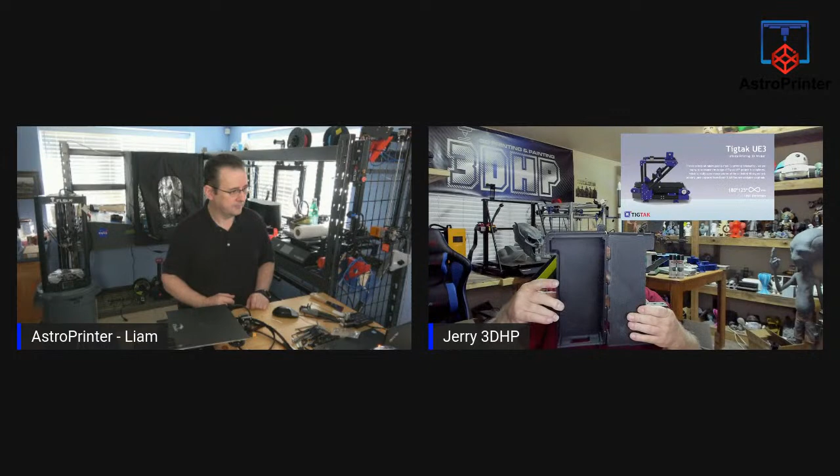What I'm partly thinking, and Jerry's even thinking the same thing, is making the two parts that are there and mounting them and gluing them together, making them permanently attached and leaving it at that. This is a side right here that's too narrow, and if I cut out most of this where it connects, it'll allow enough room that once they're glued together your power supply will fit in there. Yeah, we need an extra 10 millimeters wide on that. So I'm waiting to see if they can get it done to me in the next week or so. If they don't, then I may reach out to you, Ben, and work with you on getting it modified.

Hey Marlon, good morning, how are you? Just getting back from walking the dog.

Cool, so just one second, I want to get one thing here. I want to bring up the one drawing that I need, and I forgot to bring it up before we got started, and that's my mistake.

Yeah, I downloaded their clip off YouTube. That way I always have it. I didn't do that. Yeah, I know. It's hard to find on Facebook.

It's not that bad, just if I can get to where their group is, the one that blows up, you can pull it. Yeah, that's exactly what I'm trying to find right now, and I'm trying to find a video. I will click on groups. It's in their groups. Just give me one second, guys, I want to find that.

I forgot to pull it out, and I should have had it up, and I didn't do it. Shame on me for not being ready, but I was busy all weekend. My son had swim meets all weekend, and we only finished late yesterday.

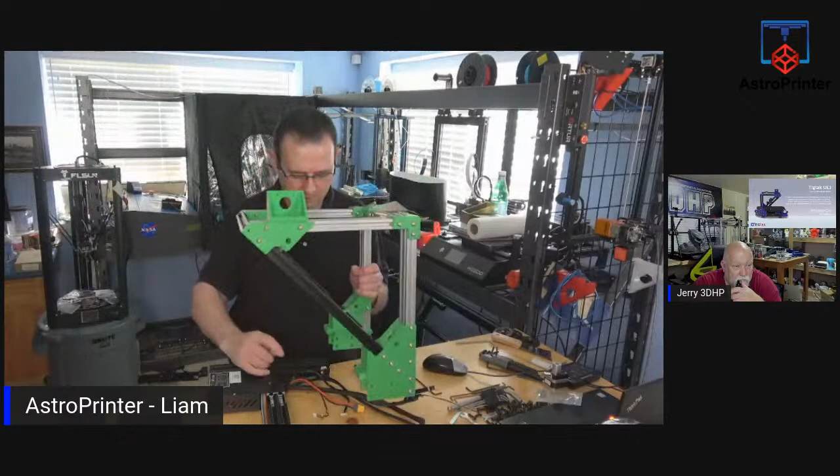Is going to attach over this. So that is what the printer is going to look like. How does that look in camera? It's nice, so this is what we're going to end up with.

And then on here is where our belt will sit. Now the nice thing is, this is designed for the bolts to be threaded through, and it is tapped on the extrusion, so we're good. So let's flip it over on its face.

All these cables everywhere, we'll fix that later. And we're going to bolt this down, and they are well aligned. Cool, so I think these bolts are long enough, they are. So I'm using the black bolts that came with it, they are M5 20s, I believe.

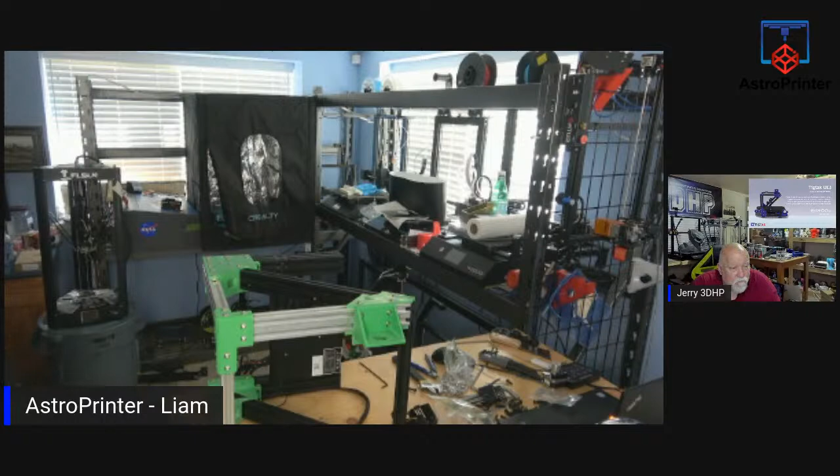So the part that Jerry's referring to is a drawer for holding tools that normally, without the power supply being in there, would go in here. But for now, I'm leaving this on. Eventually this would mount in something similar, but it'll actually be on the front, sticking out here, and then you'd have a drawer underneath the belt for storing components. And that alone is a ton of filament—yeah, it's a lot of filament that goes into that.

So flip it over, do the same on the other side. Move all of this out of the way. And we start again.

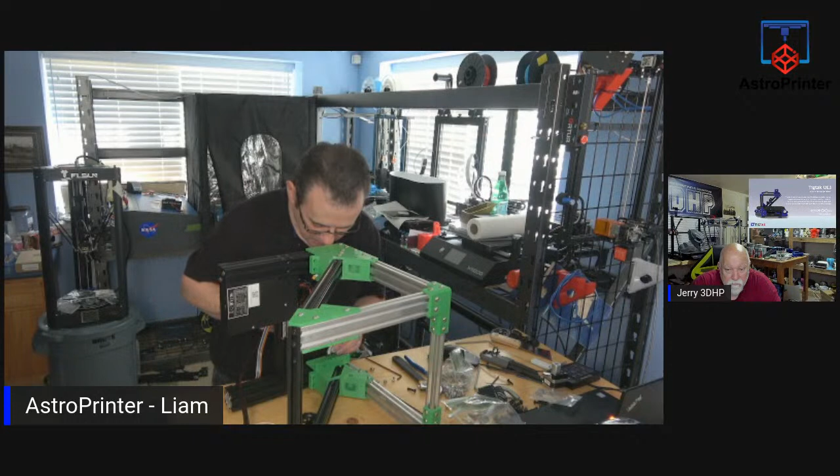So just to fill everybody up to date who's new: this is, or rather was, an Ender 3 Pro that I had, and I'm in the process of converting it into a belt printer. I'm using the Tigtak kit—check the description for the information. The Tigtak kit gives you everything except the 3D printed parts, which you have to print yourself, and the parts are designed so they can be printed on your Ender 3 or Ender 3 Pro.

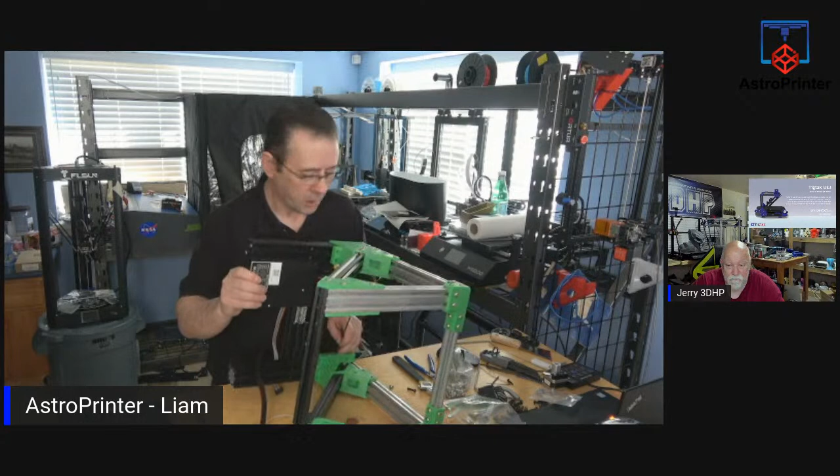No, Ben, they don't have a price for the kit yet—no pricing yet.

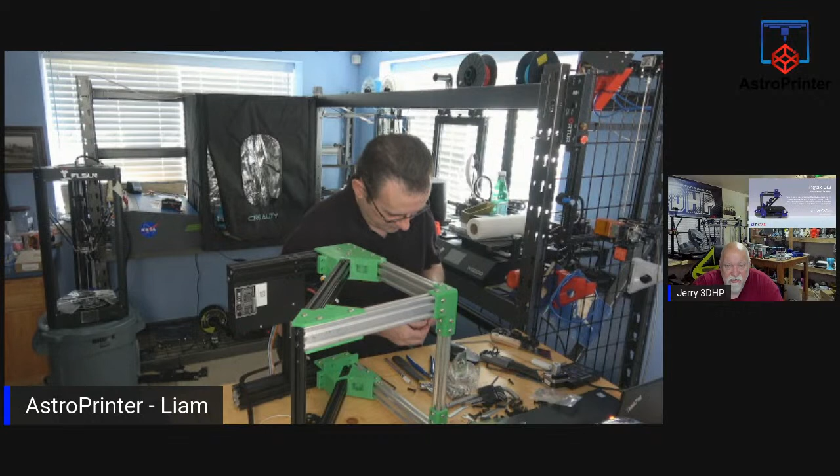The Trident is a Voron 2.4 with only three Z-axis motors, Ben says. Oh, so it's mimicking, similar to what the rat rig does, which is a 3-point kinematic bed.

I have to say, I know more about the rat rig, and that's again because I did it with Tim. He did his build live, and I watched every single episode. I'm fascinated with the idea of the rat rig, and Tim's rat rig build was really good. We all learned the good, the bad, and the trials and tribulations of building with the rat rig, but the result was a fantastic printer that he got.

Yeah, I've got a Hypercube Core XY 445 behind me. Ben helped me on the firmware on it a few years ago. Oh, so the lead screw is bed movement only. So the lead screw, so it's a...

You froze. Your video just froze. Hello RCCMC, good morning RC. Okay, now you're back, your video froze there for about 15, 20 seconds. Oh, it did? Yeah, now you're really choppy looking, waiting for your video to clear up. Oh, that's weird. Oh, I didn't know, I wasn't looking, so.

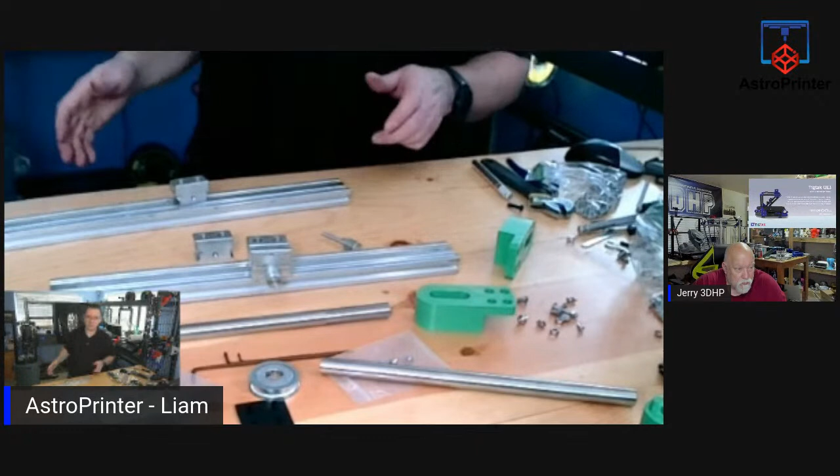So the springs they gave are not good enough. So remember, if you're doing this, take the springs off your Ender when you take the bed off, and keep them. And even the bolts that are holding the bed on, that goes down through the large adjusting wheels for the bed leveling, keep those because we'll be using them to attach the bed to here. We may have to cut them short. I may even use shorter bolts if I have them here to hold it on, but they need to be countersunk. But we will have to redo that.

So let's get these 4 assembled first. We're going to do the same setup, overhang this with the bolt. So bolt in, spring that fits off the Ender. That's 2 done. Ben says so.

The kit comes with different heated beds. My kit came with 2, and it doesn't use the Ender bed because the Ender bed is too big. I'll show you the bed in 1 second. Let me get this one put together, and I can show you the bed.

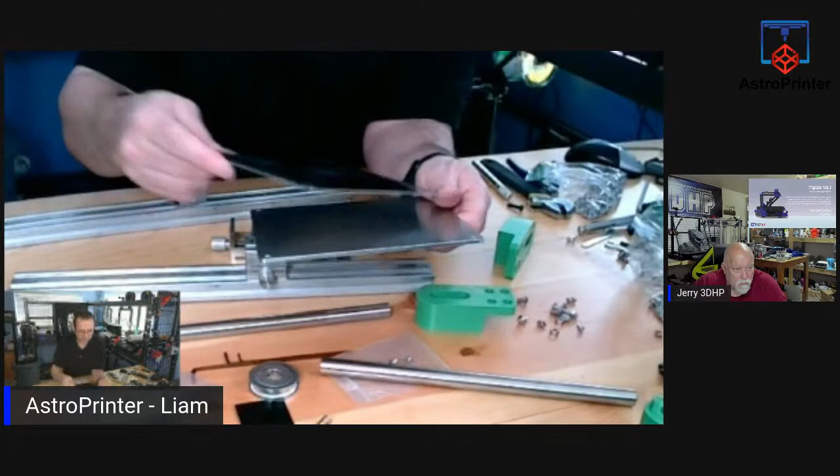It came with a heat bed, with a heat plate, and a bed that's not even solid. There's no wires on the end, so you have to do all of that. But this will attach here, and then mount on these, like so, 4 of them. 1 here, 1 here. In those 2 locations, on each side, and then you'll turn it so the plate where you solder your hotbed on, these pads where you solder on the wires, come out to the side, because I'm thinking I'll have to drill a hole in the side of one of these extrusions to pass the wires out to the outside. Now it did come with a second heat bed, and it was a small one.

I can show you. The first version of the kit did come with a small heat bed, but it's too small because it's way smaller than the build plate. If you do a comparison in size, way too small. So this is actually not used.

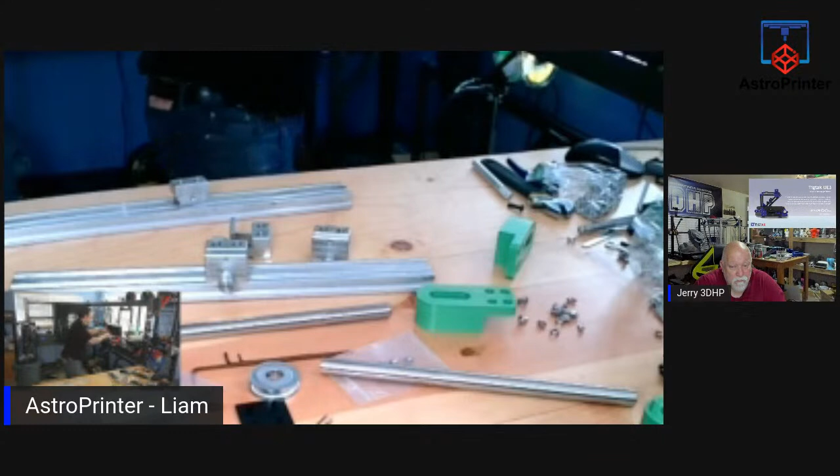Now, by the time they start shipping kits, Ben says it looks like an Ender 2 Pro size bed.

And you froze again. He'll be right back, everyone. Did we lose connectivity? Yeah, you froze again. I don't know why, about 15 seconds. I'm very sorry about that. I've been having intermittent issues with my internet. I don't know what's causing it. Did you hear me tell you were froze, or you couldn't hear me? No. Huh. Hard. You froze again. Yeah, I don't know, I'm still here.

Jerry? I can hear you, but you're still frozen. Now it looks like... No, I wasn't, I was just standing still. Ben and everybody, was it only him that was freezing? I didn't freeze, did I?

I'm having intermittent issues, I've seen it happening when I stream. I'm wondering if my ISP, because they did say I use a lot, I'm a high utilization person since I do a lot of uploads and stuff. Even though I paid for a business connection, part of me wonders if they're capping my internet connection on specific media types that I stream.

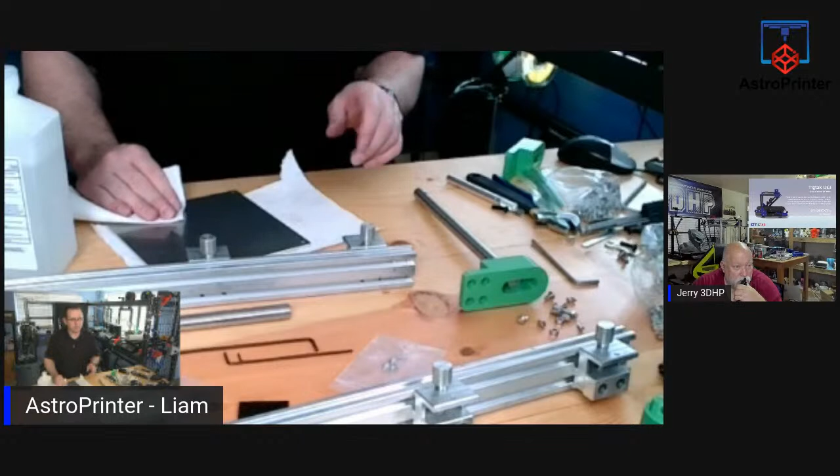And as I said, each day I have multiple computers here, and I have to restart my internet connection almost daily, so I don't know if it's that. My CPU is running at 16% right now - it's not CPU utilization. So that's done.

Let's attach the bed - I'll clean that as well.

Ralph thinks if you were throttled, your video quality would just go down, and not maybe. I don't know what's going on, but it is something weird - I shouldn't have these issues, I haven't had them in the past, they've only been happening recently.

So I'm going to mount this so these come out to one side, but this is square, so it doesn't matter how I do it. Are you hardwired? Is your PC hardwired to internet?

He froze again, he's thinking about it guys. So what did you say, Jerry? I said, are you hardwired or wireless on that PC? Hardwired, always, everything in my house is hardwired. Okay, and you just froze right as I said that.

Yeah, okay, I need to do one thing. I need to measure the size of this. So it's... this is, let's go to 150.

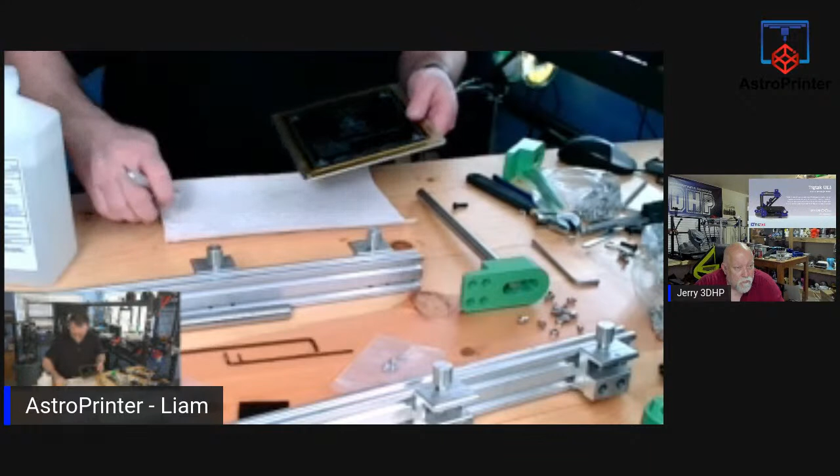So I will be mounting it with these coming out one side so I can run the wires out. I just haven't decided which direction yet, but we'll get to that.

Now let's get on some of these components. First of all, these go into this using these long bolts through the threaded hole in the bar, right? There's a hole in each end. And this is our belt adjuster.

I'm only going to set up one side, because I have to slide the belt over it yet. And that will mount on. Did I put that on wrong? No, I didn't, okay. I'm going to mount it on this one, like so, and these are threaded. So that's perfect. I will be doing my extra long bolts again that I had to add on myself.

Oh, these were the 20s that I went and bought? They're 30s. 30s? Okay yeah. I think you said 8 of them. Well I was guessing 8 but I bought 10. You might need more, sorry Jerry. Well I counted 8 because there's 4, there's 2 for each of these, that's 8, but there's 4 for these. There's another, so you might need another 8, maybe even more, maybe 16 more. Okay, I was only going by what I had already seen and I hadn't examined everything. So alright, sorry. No worries. Yeah, but I just bought a box of them because I know I will use them on other projects at some point.

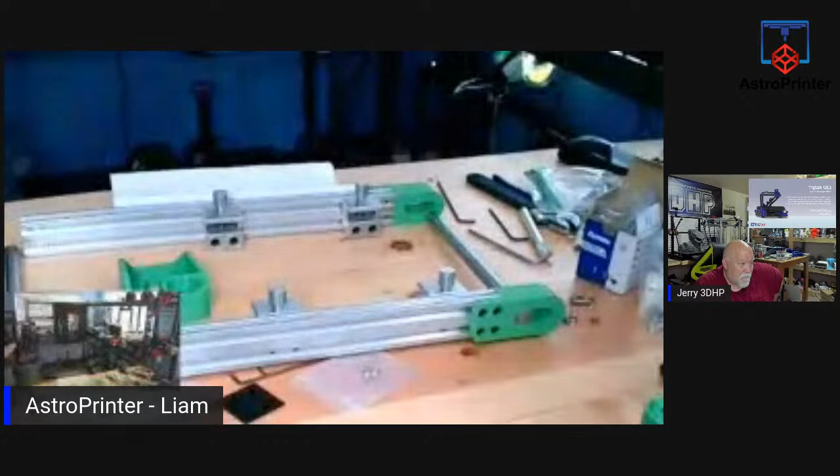You got a ding if you can hear me. I didn't see where it came from. Was that Twitch? You got a ding, check Twitch to see what notification came in. I heard a ding, like if it was a sub or something happened.

There's a part I can't seem to find, and I don't know why. I know I printed everything, and I hope it's not my stupidity that I didn't print a part, but I'm almost sure I did.

Yeah, you just got another follow. I did, but Twitch didn't update for me, it didn't say. Jim Zantoris, I think it's pronounced. Oh cool, because I heard the ding, I just didn't see where it posted at. Yeah, I didn't see anything posted.

Hey Corey, so there's a piece I can't seem to find. It's a piece like one of these, but there's no slider on it, and I do not know where it has gone, but I know I printed it. One moment, there's only one other place it could possibly be. Yes, this is a podcast with intermittent video, but we still get the idea.

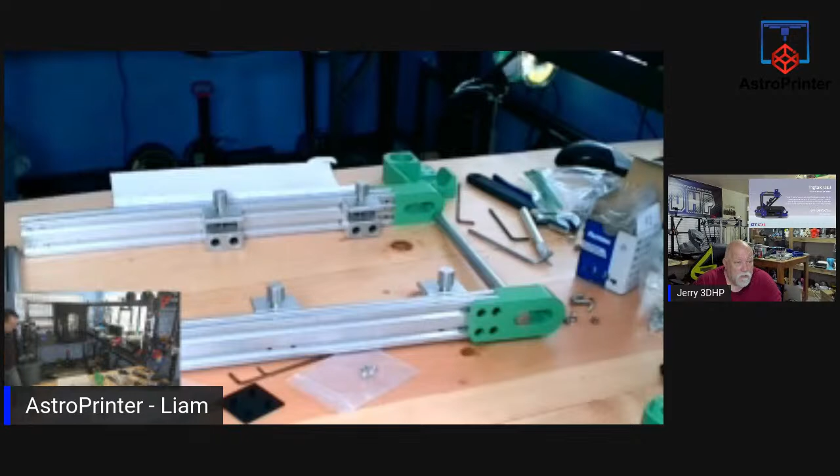I am missing a part. What do you think you're missing? I'm missing the piece of this that attaches down here on one end, that has no slider in it, just an opening. And I know I printed it, I've seen it, I just can't remember. I can't find it, and I probably put it somewhere, and like the idiot that I am, the special idiot that I am, I don't remember where I put it. It's not here. I normally put the stuff up here because I know I'm going to be using it for the build.

All right, we can do other stuff anyway, right? I can continue, so it's fine. So on this area where this slides, there's nothing driving. Yeah, that part, yeah, I know I have it printed. That's the one, yes, that's it, Jerry.

Since there is no belt on this end here, there's no drivers on this, right? There's not moving the belt, the smooth rollers, these two pieces go on here.

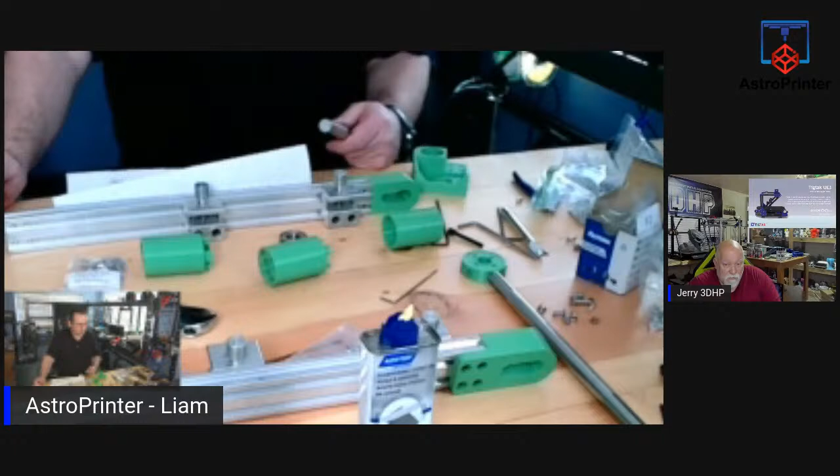Grind the rod down a bit. I could - yeah, 608 - I could get wet and dry and polish the rod down. You have any emery cloth? I don't have any with me, but I can get some, I can buy some today. Use emery paper and polish the rod down to make it fit better.

It fits these fine with a lot of clearance, and that's okay - when you use these, it's a snug fit, which is what you want on these. How far does the bearing have to go in? About that far. Okay.

Because I need to have this in here on both sides. Where's the other one? I can show you one side. This goes on, then these slide on over that with the bearings in them, attached together, like so. With the bearing on the other side, that bearing is already in there. So let me knock it out, like that, and another one on this end, and then there's another joining on here like this to create the belt tension.

I could try heat the bearing, but I'd have to mark the exact position of everything, lay it all out, heat it, push it together, and then mark exactly where I need it, let it cool.

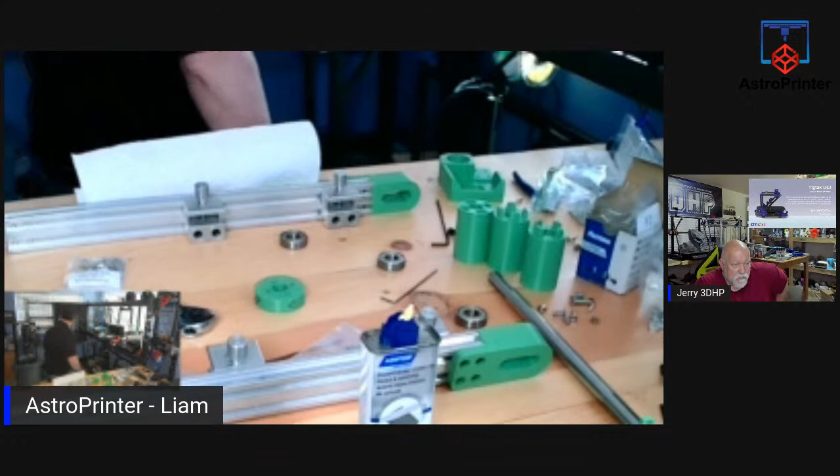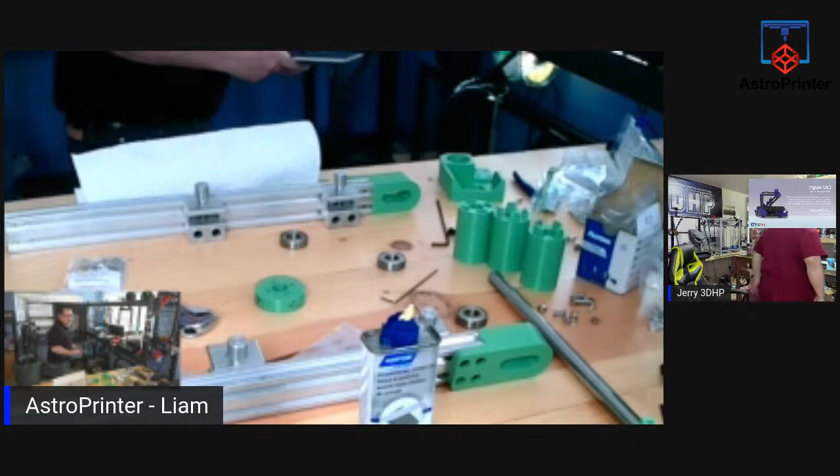You know what, you'll never guess what I have left over from the build. I have a heat bed.

It's got a BuildTak surface on it though. Do I have a different bed? I have got a glass heat bed. That might be better.

One second, guys, I want to get a board to put this stuff on. I have a heat gun here, but I need to measure this up first and mark it. Let me do that, let me get everything else in place temporarily, and then I will.

Hey, Liam. Yes, sir. My bearings slip over my shaft and they grab it. They have to be tapped on, but I can do a press fit and hold them. Mine won't, see that?

No, but they need to go way in. I know, I can tap them on, but I'm saying with my hand I can just line it up, press it a little bit, and it'll stay there, and I just finish tapping it. Yeah, but no, it has to go way in, it has to go 2 inches in there, and you'll probably damage it in the process.

Yeah, it's working. All the way in? No, I'm not going to take it all the way, I might have to pull them back out. If I can mark them and get this all lined up, which I'm going to do now. Yeah, they'll press fit, and then you just tap them on, but they'll barely start, line them up straight, and they'll press, and you got to tap them on the rest of the way.

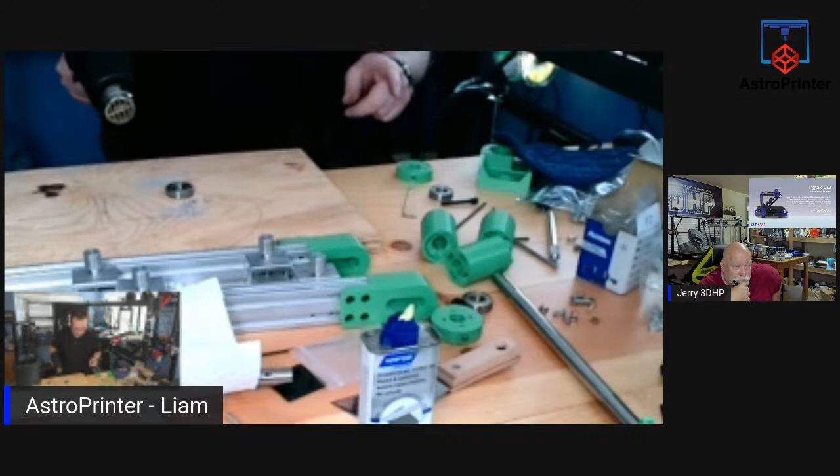I'm afraid I think you're going to get it so hot that all the grease is going to run out of that bearing. That's what I'm worried about. But I have to heat it up. Maybe if I heat it somewhat, it might work. Or maybe at some point, if this doesn't work, that's fine. But what I can do is try putting the rod in the freezer, and heating this somewhat. And one's going to expand and one's going to contract, and maybe the sides fit together then and they'll lock in properly. Well, we'll give it a try on a low heat first.

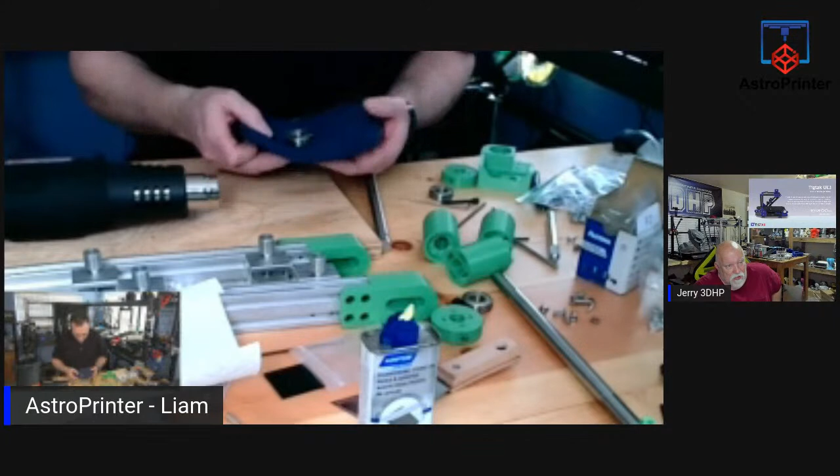So tap, put pressure on that. I don't have any bearings of this size. I have other small bearings, like really small ones.

Another option - do you have a bench vise? I have a bench vise, but it wouldn't have that depth. Well, the bench vise overhangs your counter, then you set the bearing on it, and you just open it up just far enough, like it's a socket, and then you tap the rod down. That's a good point. Yeah, I could do that. Tap, tap, tap.

Yeah, so I think I might be better off to freeze these. By freezing them, this will compress. And if I heat that and freeze these, that'll expand a little bit, that'll compress a little bit. They might slide fit, and then I don't want to tap it because it's very tight. The moment it gets to the center of that bearing, even less than a half a millimeter in, it's grabbing, and that's really, really snug.

Now I could tap it on - I'd have to get something this size, and if anything goes wrong, you probably never get it off again, right? It's got to be tight though. If it drops on freely, then it doesn't serve a purpose.

No, I agree. That's why I was thinking if I freeze these, and when it's absolutely freezing cold, like in the freezer for a couple of hours - I'll do it this afternoon - if I can freeze these and heat the bearing itself, then when one's hot and one's cold, this should give a little bit of clearance so it'll go on.

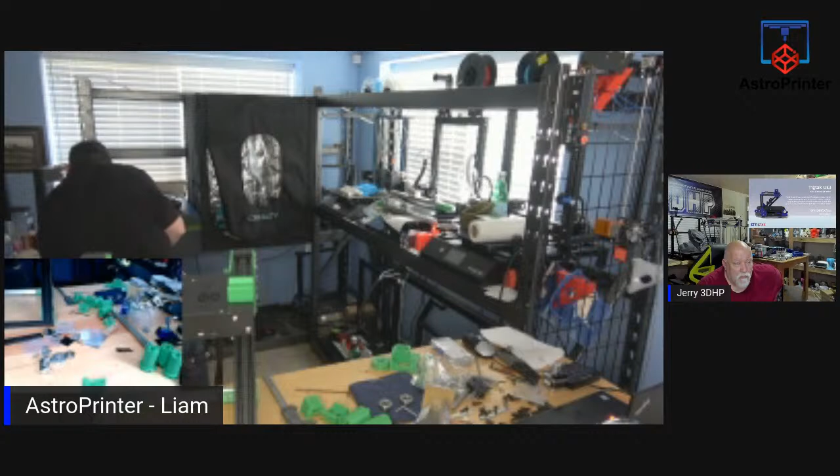Where else could I get some? Could I steal some M515s? I don't have any spare parts there. I don't have any M515s, I don't think. There's nothing left in this kit, no bolts at all in here. There's one, but it's not the right one.

Looks like I think M5s on this. I think these are all M3s and M4s. Yeah, they're all M3s and M4s. Let me have a look. These are spare parts I had from other projects I've worked on.

You don't have a bin in your room with all kinds of extra parts from anything and everything? I buy stuff as I need them, and if I have stuff left over, then I keep them together. I use a company nearby me called Fastenal. They have all of these little components, these little parts.

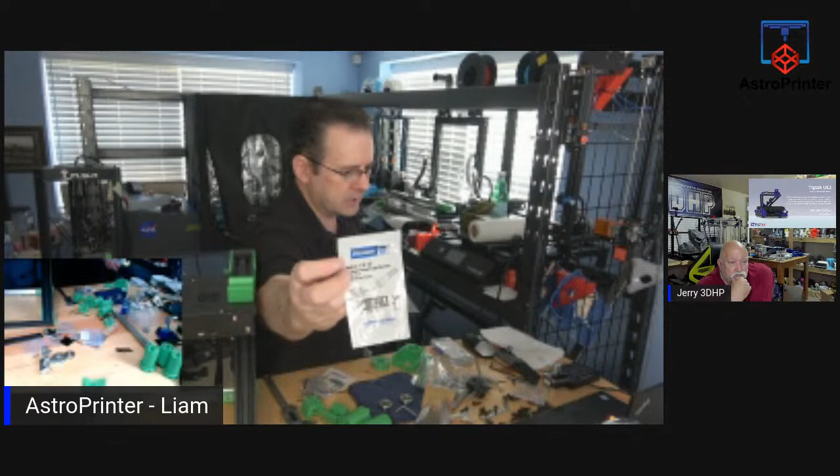Cool, and they're only open on weekdays, so if I pay them a visit tomorrow, they'll have exactly what I need. If I take down one and say give me 10 of those, they'll just put out packets and give them to me. They do boxes or individual small packets, so you have the option of buying in bulk. These ones I bought at Fastenal, but I bought a box in because I knew I'd use them and need them at some point.

But these are a little too long. And these ones are 5 mils. The ones that come in the kit are 5 mils too long here.

A hot-end sock might have an odor? I've never noticed one on a sock. Say that again? Ryan's Enigma is wondering if you put a new sock on a hot end, should it have a bit of an odor when you heat it? It might at first. Sometimes when you first heat silicone, you can get something that gives an odor off it, but it goes away.